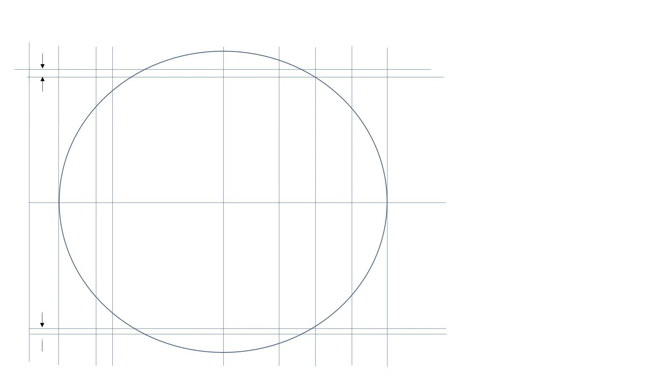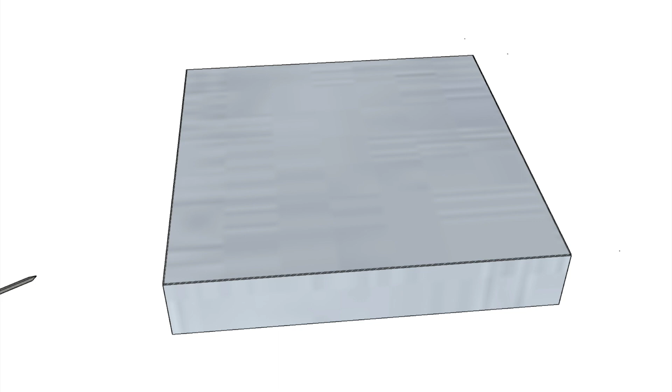Base is 12 inches square and 1.5 inches tall. I made that with just a piece of sheet metal, folding the four sides down relatively thick so that it maintains its rigidity. The box or the light itself is 10 inches square, 9.5 inches tall.

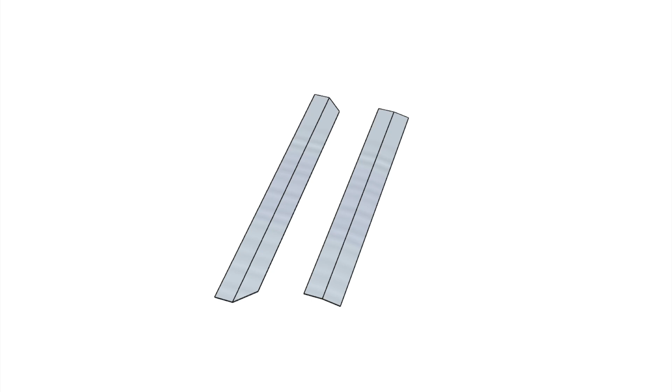Again, the pieces are made mostly out of aluminum extrusions that you can buy at the hardware store. And the flat bar stock is also available at the hardware store in aluminum. This lamp I made out of galvanized steel and used solder, but you could do this with aluminum as well. Most of my joints are put together with pop rivets.

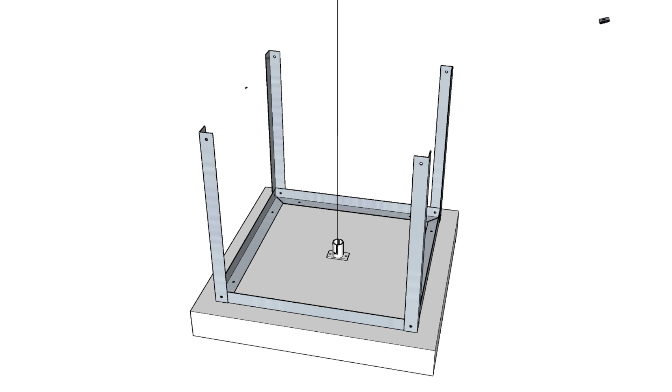So here's how I bent my own, but you could buy the angle iron. These are just applied to the base, mitering the corners so they fit tightly together, and they're pop riveted down. The corner bars, 9.5 inches long, are pop riveted to that lower frame, and the top 4 bars again are mitered and pop riveted to the upright bars, and that is basically the framework of the lamp.

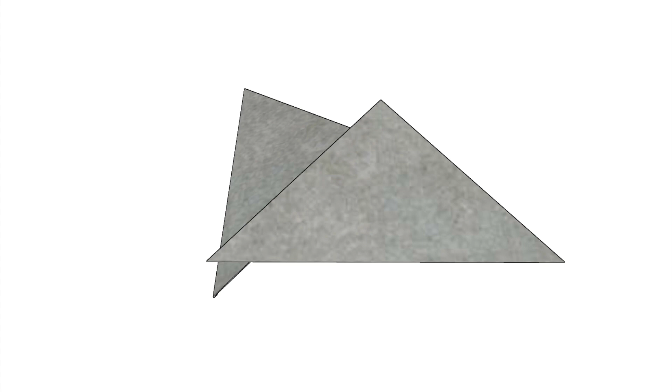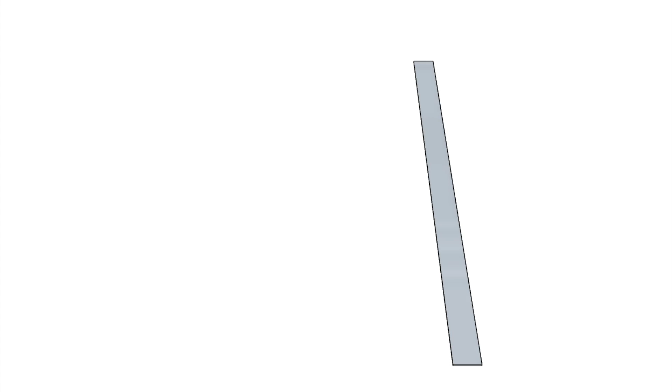Then as for the design itself in the windows, so to speak, I did mine this way. Again, any design would do. You could make this look Craftsman or Prairie style or Mission style or anything you want. I put these pieces together with solder. You could do this with JB Weld as well.

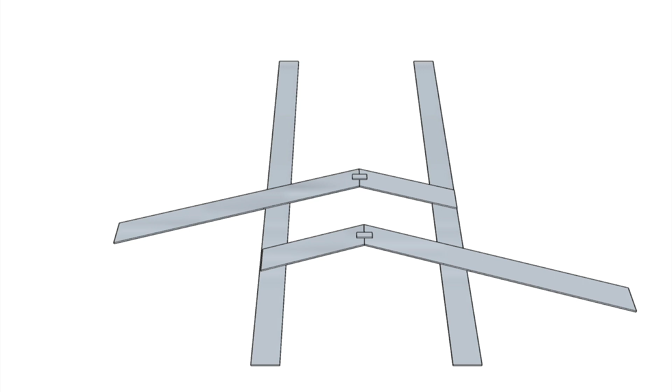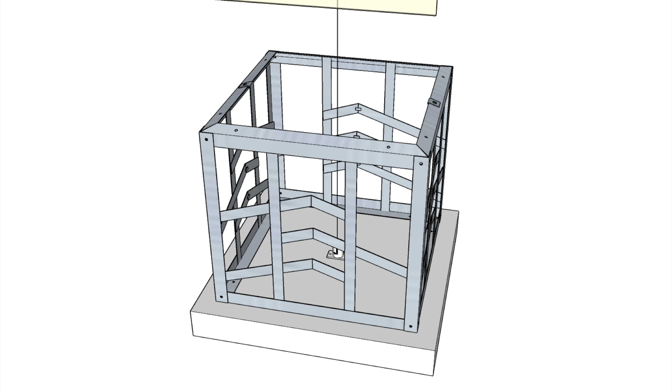Once those pieces were built, those 4 faces of the lamp were built, I simply install them within that framework that I built earlier. Once those are in place, I got plexiglass, just plastic, fogged it by sanding it, and put those in place, and then put the lid on.